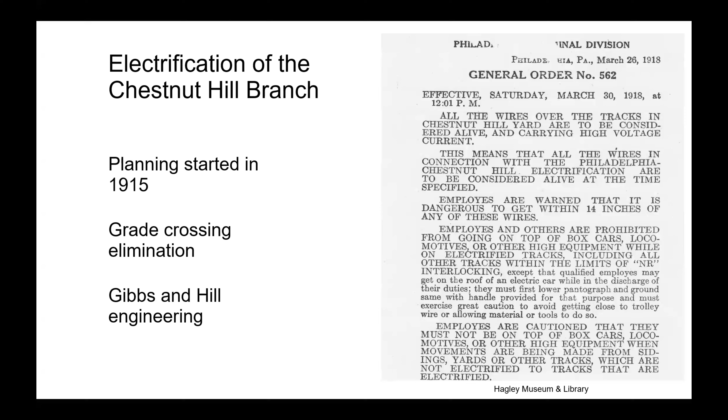The interesting thing is that the original electrification to Paoli - let me find my cursor here - they come out of Broad Street Station over West Philadelphia, and they head up here, going out basically the main line to Paoli. At that time this was referred to as Mantua Junction.

For the Chestnut Hill line to be electrified, it wouldn't be any good unless you also extended the electrification from Mantua Junction up to essentially where the Chestnut Hill Branch comes off in North Philadelphia. So this 3.1 miles had to be electrified along with the electrification of the Chestnut Hill Branch.

Okay, so prototypic modeling of PRR electrification has two components. One, it's the wire components, the catenary itself, the messenger, auxiliary, and trolley wires. And all of that has to be put onto some sort of supporting structure, poles and bridges and so forth.

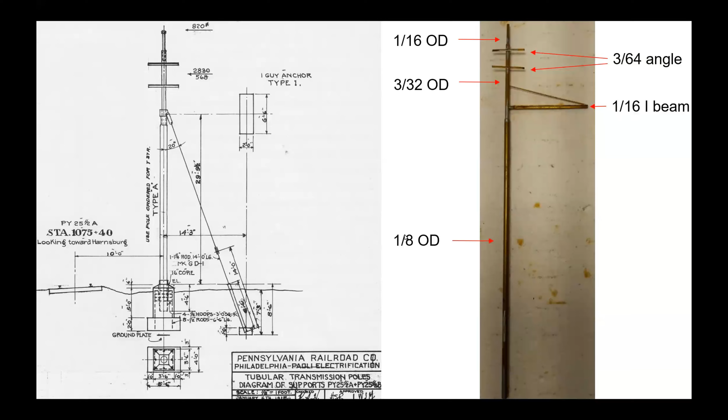And so this is a model of this kind of catenary structure. This is on my layout, part of which is the Chestnut Hill Branch, and this is kind of what it looked like, right?

What was that? Okay, so what I then began looking at, because part of my layout covers this territory, are the catenary bridges between Mantua Junction and North Philadelphia Station. And I don't know whether it's fortunate or misfortunate, but it turns out that this 3.1 mile stretch has the most unique catenary bridges on the PRR. You don't find them anywhere else. And this was, again, very early work, because remember, these had to be placed in service in 1918 to connect up the Chestnut Hill Branch.

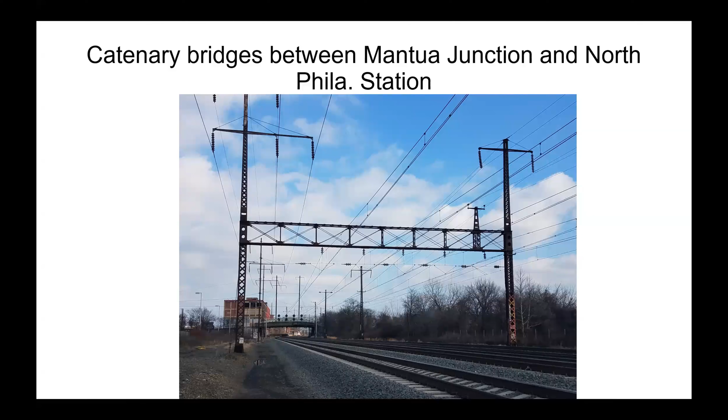So this is a nice picture of one of these structures. Here's another one. This is down by 22nd Street, and it's a very unique structure. You just don't find it anywhere else on the PRR. So there's a number of these. I haven't counted them up, but they're along that 3 mile stretch from basically what we call now Zoo up to North Philadelphia.

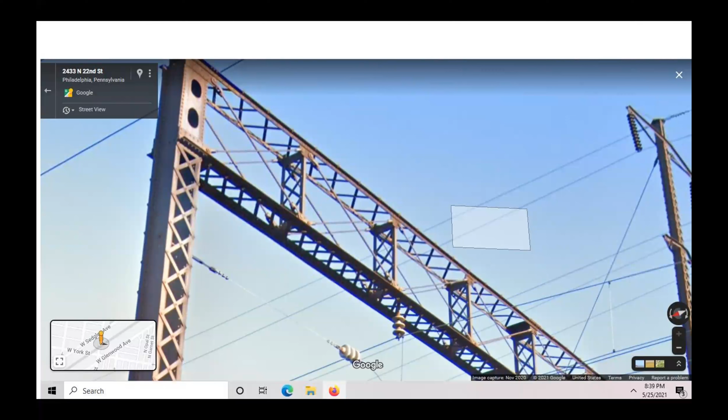So what are the challenges for modeling catenary bridges? Well, first of all, you want the bridges to be sturdy and ideally of brass, because once you put in the effort to put the catenary onto this, you just don't want somebody to come and nudge your bridge and bring down a year's worth of work in an instant. So both Andy and I like to have something that we feel is really robust and might withstand a nudge from an errant hand or arm.

But there are some difficulties that have come up over that time period. So when Andy wrote those articles in TKM in 2007, a company called Special Shapes was still in business, and they made all sorts of brass shapes, H-beams, I-beams, in all different sizes and so forth. The problem is that a few years ago, Special Shapes went out of business, and so getting a lot of these things is very difficult now. K&S, which is the parent company for Special Shapes, still carries a limited selection of brass, and I've used some of that, but it's definitely much more challenging now than it was, say, 10 years ago, doing some of these structures.

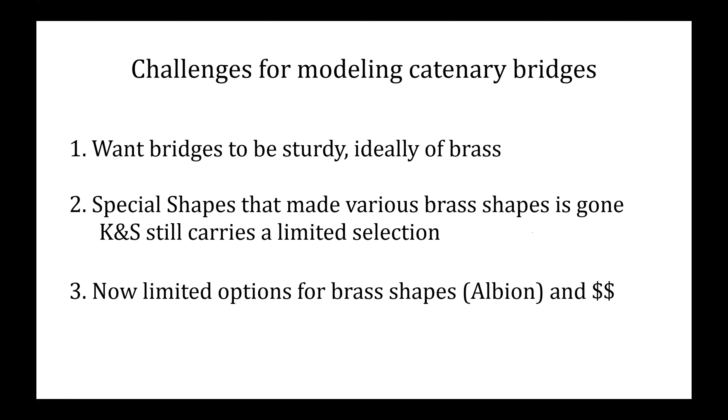The other thing that's come up is that there are limited options for brass shapes from a company called Albion. They are in England. They don't import directly to the States. What you have to do is go through a sort of intermediate person who's in Canada, and you can order. They have a number of useful brass shapes, but it's very expensive, and you can't get them in the lengths that you used to be able to get from Special Shapes. So it is even more challenging now doing this kind of thing.

So what Andy and I have decided to do is try what we call a hybrid approach. And so the first thing is to try and build some underlying structure with brass components, so your structure will be robust. And then where in the past you did it with lots of little brass parts, you now substitute styrene components. And this seems to have worked fairly well. And I'm going to show you some of the things that have been done.

So I'm first going to start out talking about the catenary bridges that I showed you in the two pictures. And what I've done is we have K&S. This is a .064 by 1/4 inch brass stock, and we have the two legs with that. And then we have the Albion angle stock going across the bridge.

And for those who are catenary aficionados, this is also the steady span you can put in at this time. This is phosphor bronze wire, and also the hangers for the messenger wire. Now, you'll notice that the legs are not even. The track level for this catenary structure is going to be right along here, and we have one leg extended several inches below that.

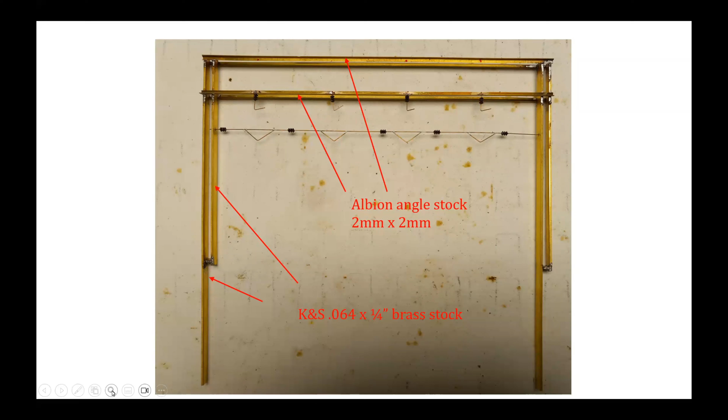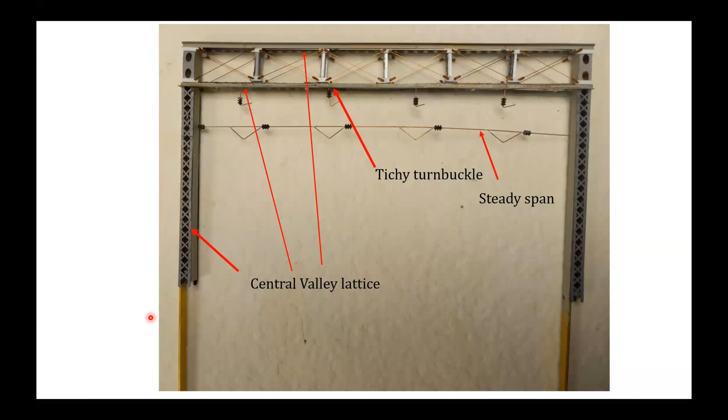And the reason for doing that is that I've used what I think is one of Andy's brilliant ideas, which is to put outriggers below your bench work so that you can slide this leg into the outrigger, and the outrigger then has a screw that's perpendicular to the leg, and as you lower this in, you can tighten this screw and it holds the bridge in position.

Now you say, well, why do you want to do that? Well, when you're doing all this catenary stuff, there has to be a fairly great deal of precision. This point right here has to be 22 scale feet above the railhead. If you're just putting some sort of structure onto the layout, you're going to have a challenging time making sure that you're exactly at the right height. But with this outrigger, you can slide this thing up and down until you get it in just the right position, and then you tighten the screws. Later on in the talk, I'll show you one of these outriggers.

Okay, so once we have the brass portion done, then we can add the styrene portions that make up a lot of the detail. So the first thing is on the legs. You recall they were all lattice, and this is Central Valley lattice. It actually comes as an L-shaped thing with solid plastic. You can just cut that off, and so you have lattice on each leg.

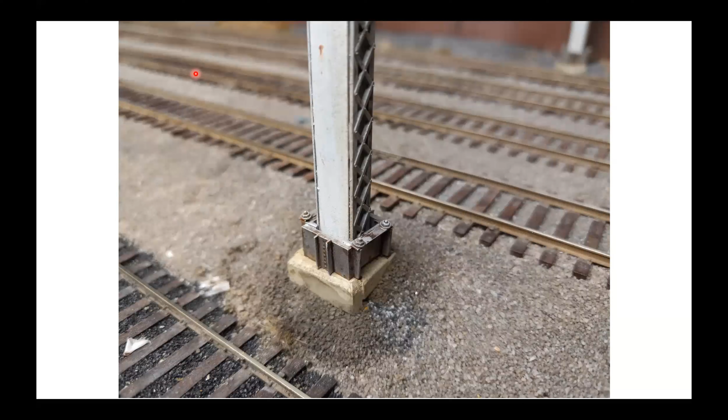And at the bottom, certainly these lattice type poles were not just plunked into concrete, but they actually had a steel sleeve that they sat in. I didn't bring the pictures along for this, but I have close-ups I took down in Marcus Hook, where you can see the structure for holding these lattice poles in the concrete base.

Okay, so we've covered the lattice poles here and all the stuff going across here, the turnbuckles and so forth. Now we're left with the transmission poles, and these were very important because we needed these lines for the power. And you'll notice that the poles are not simply straight lattice, but they're pyramidal, one over here and one over here, and also of varying height. And this is also a nice prototype shot of the steady span going across here and the hangers for your messenger wire.

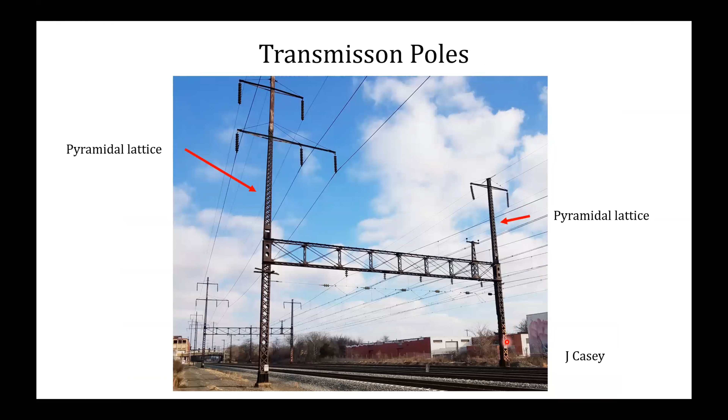And here's another example up in North Philadelphia, where you have your pyramidal poles. The important thing I want to show here is that the location of the pole can change. Here they're on the outside. And if you remember the picture I showed of Andy's K bridge, the transmission poles are on the outside. But in North Philadelphia,

you have a problem, and that is this stretch of trackage went through a canyon of factories. On this side, you can see the buildings. This is obviously a very recent shot, but when the catenary was first put in, 1915 to 1918, there was actually a sister building to this that ran along here. And so what the railroad did was move those transmission poles inward so that they did not have interference or be too close to the buildings.

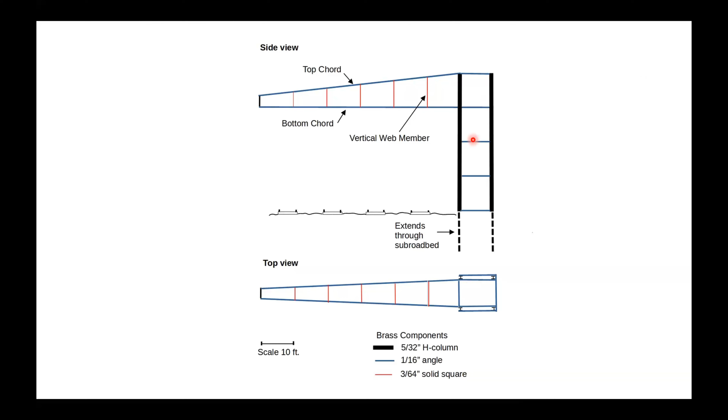Okay, so Andy's strategy was first, let's do the vertical supports, which are here, over here, where the heavy black line is, and connect these up. And this shows how he's got it all clamped to the table, and then soldering the brass here at 10-foot intervals. And when Andy says scale 10 feet, he means 10 scale. It's not 11, not 9.5, it's 10. And so here, what he's done is the one side of the vertical support, and now he's put on what are going to be the bridge itself. Okay.

So here's our drawing, and here's what he's soldered together so far. So first of all, you notice that the legs are extended below because they're going to go into an outrigger. The other thing you'll notice is that this top chord is now bent so that it goes, much like the prototype, down over here. And to do that, what Andy did was he sort of nicked the brass here with a fine cutoff disc, so that it gives it a little flexibility so you can bend this down in this smooth bend. And we kind of decided the ends should be about 3.5 scale feet apart. All right.

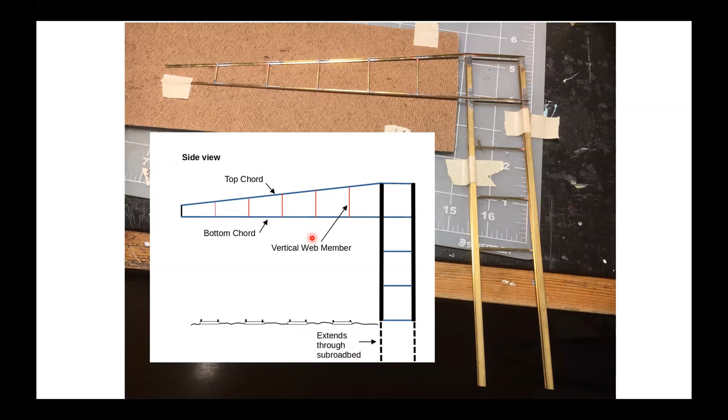Okay, so now this becomes a very interesting sort of topological issue. If you've made this, and you've actually made two of them, then how to assemble this into the three-dimensional structure in the end. And so if you look very carefully, here's the top chord going down off the bench, and he's got this clamped down, and he's now assembling the two halves of the catenary bridge.

And so the top view, and here's another important issue, and that is that when we looked at these pictures, albeit from a distance, you could tell that the bridge itself, not only is it going downward, but when you look at the top view, they're also coming inward like this. So this distance is also 3.5 scale feet. And so again, what Andy did was he put some nicks in here so that you can bend these. If you just try and bend it without those, it doesn't work. So he's bent these, and to do this, he carefully made a template.

Okay, so here's what would be the center of the structure and the center line, and he's got to come down to 3.5 scale feet here from 10 scale feet here. And there it is. And so he can put this in here and then basically solder the two top chords together with solid brass. And if people want to look at a detailed description of this, it's in the latest issue of the Keystone Modeler. And so this is what the brass structure looks like at the end.

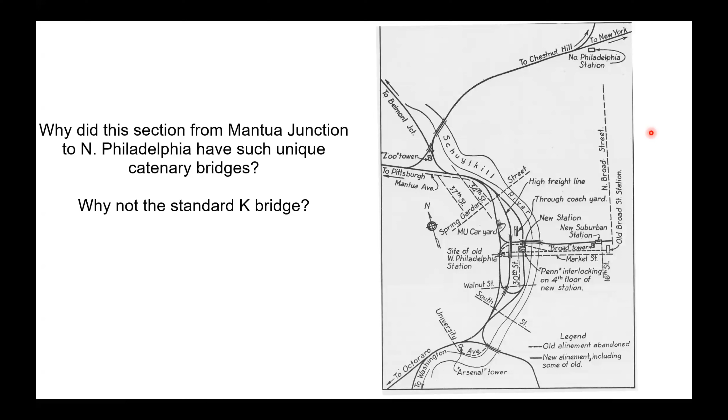So why did this section from Mantua Junction to North Philadelphia have such unique catenary bridges? Because you don't find these anywhere else in the PRR. And why not the standard K bridge? And I think the answer is, in a sense, technology. The K bridge uses H beams.

Well, it turns out H beams were, well, the Bethlehem Steel got a patent for them in 1908. In 1911, they started appearing in the Bethlehem Steel catalog. But I think this was very early on, and I'm not sure that, for instance, the K bridge that I showed you earlier from Andy's layout, we're talking about a beam that's got to be about 100 feet in length.

And I think this was a technology that was being developed in this time period, but I suspect it was not really available. So the PRR chose this alternative way of doing it with the lattice structures that I showed you in this time period.

And it's kind of interesting when you look at later electrification. In 1924, I don't have it on here, but the Fort Washington branch was added onto the Chestnut Hill branch. And they used actually cedar poles, basically telephone poles, for the electrification. And it's not until 1926 that you start seeing K bridges, which appeared on the West Chester.

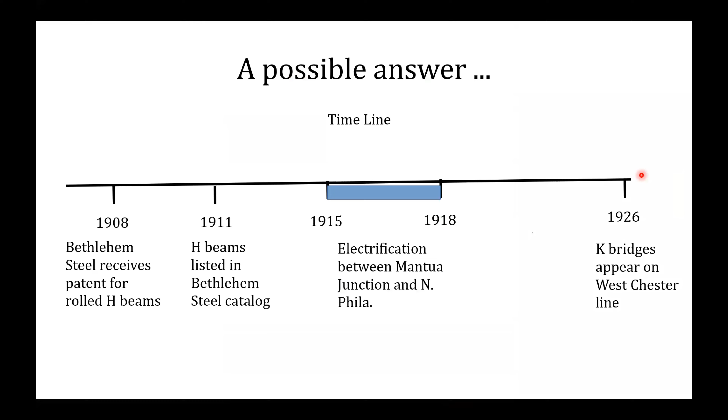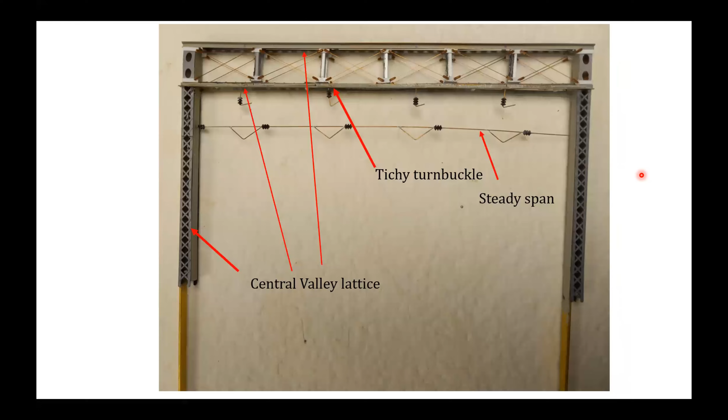We'll get there. Okay. Sorry. Looks like slide 11. Yeah, this is slide. Right. See if I can do this correctly. Okay. There we go.

The online question in the beginning, what was used for insulators? Model or real? Model, I assume. Tichy insulators. Don Tichy's insulators are really very nice. I mean, they're basically prototype. And what you can do is buy them by the big box full, because on the transmission poles, each of these is a string of 11 insulators. And so you can go through quite a few.